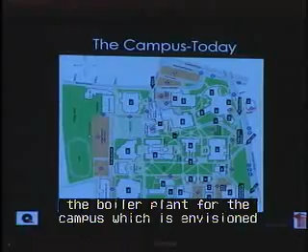For those of you that aren't intimately familiar with where the facility is going to be located within the Queens College campus, there are existing tennis courts sandwiched between the gymnasium and the library, and that whole square is what we'll be taking up with this facility. We're also adjacent to the primary parking garage on campus, and currently what is the utility plant, or boiler plant, for the campus, which is envisioned potentially down the road to be sort of a mirrored quad of the one you have to the south.

Specifically, I'm going to let Louis talk about the design response from Design Collective and how this particular facility fits into that and responds to some of the forces acting on it from each side.

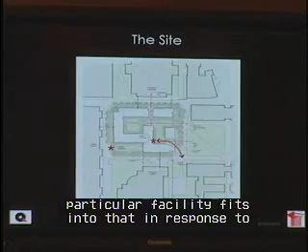Well, as Bruce mentioned, there are several factors that affected this design. The potential for a master plan implementation that would call for that north quad could not be avoided, and the RFP said we had to address that, and of course we did. But also, one had to take into consideration where people are coming from day one - there's a lot of traffic coming from the south quad, from the library, and from the arena. So we took that as an opportunity to say, well, let's have the best of both worlds - let's have this work from day one and have it work in the future.

You can see these sort of delineated axial lines. There's a main axis coming from the arena, so we have an opening in the building you can literally walk through outside. We have an axis coming so that if the quad is built, you could come from that sidewalk directly into the project there as well.

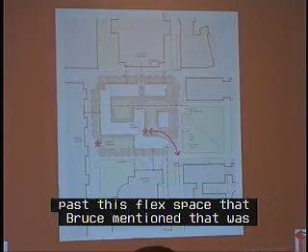The main entrance, shown by the dotted red arrow line, is where most of the traffic comes from now and will likely continue in the future. It takes you underneath another archway, past the flex space Bruce mentioned that's open to the whole university, and directly into the heart of the building.

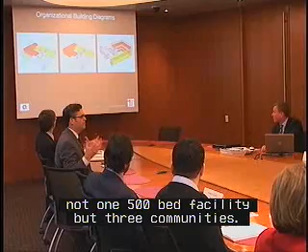From there, these are a series of diagrams we used working with the university to talk about breaking the community into not one 500-bed facility, but 3 communities. If you look at the diagram on the left, we broke the building into 3 buildings arranged around 3 courtyards.

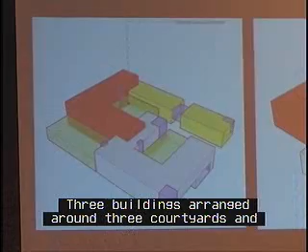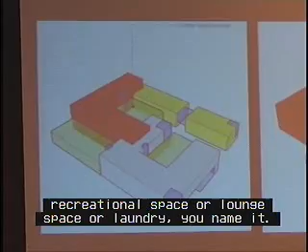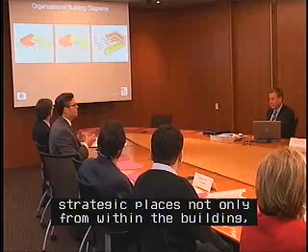Each courtyard had a series of events. In the middle slide, the blue cubes represent all the parts of the program where the community comes together, whether recreational space, lounge space, or laundry. We placed those in strategic locations, not only within the building but also terminating axes within the campus, creating opportunities for exciting architecture.

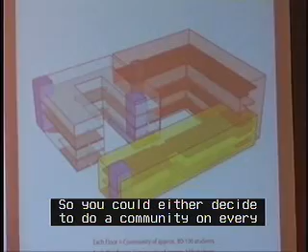The last slide, to the right, talks about flexibility, something the president mentioned. The building can work as either 3 independent buildings, or there's one core that allows it to work horizontally on every floor. You could decide to do a community on every floor at about 80 beds per community, or have every building be its own community.

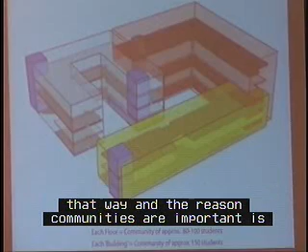Communities are important because they make people feel part of a group. They know the people on their floor, and sometimes you can group, say, certain master's programs, athletics, or music programs together. It's a lot of flexibility, and that's what the diagram on the right-hand side shows.

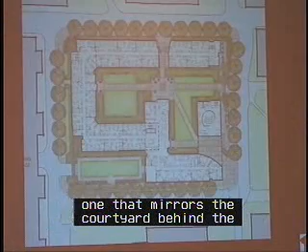Here is the actual plan itself, creating 3 courtyards. Some are more public. The one to the right-hand side is where everyone passes through the project—it's very public. The one to the upper left-hand side is very private, primarily a lawn. The lower portion mirrors the courtyard behind the library.

That courtyard will get some bike storage in addition to being an open space, and it will have an entrance off the backside so you can enter this building from many points. We didn't want to create a wall to the university—we wanted it to feel very porous.

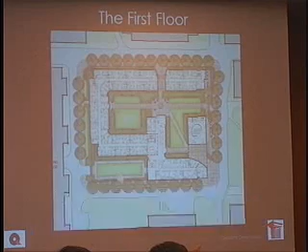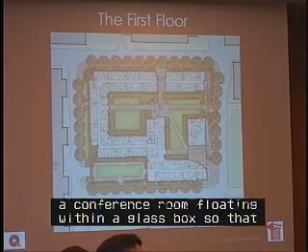However, there is one main secured point. As soon as you come through the main archway, you see the curved path that takes you to one controlled, secured point, and that person can see the elevators—nobody can get any further than that. In the flex space, the square space with the round space within it is a conference room floating within a glass box.

What? Oh, I'm sorry—that's right, the pointer. I know the project a little too well. I have to tell you, I especially bought that pointer at lunch today because he was concerned about not having a laser. I'm sorry, my apologies.

The pass-through here leads to the main entrance, with the security desk and elevators centrally located for the facility. This is the flex space. In the future, this facade could possibly front this quad, and even if it doesn't, it's still the front facade.

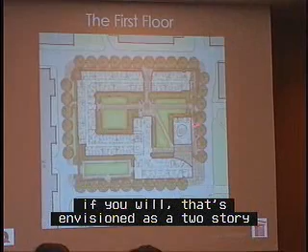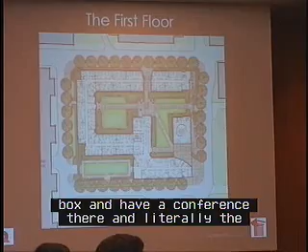It's envisioned as a 2-story glass wall that could be very flexible, so you could have a performance space or a cafe, but if you wanted, you could turn it into a black box for a conference, with doors that close within that inner volume.

This slide is somewhat hard to read, so just so everybody knows, I do have printed copies of this—if you would like handouts, it's a little bit simpler on those.

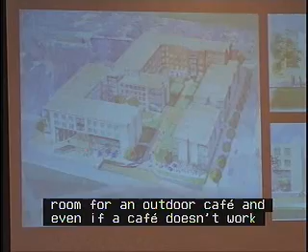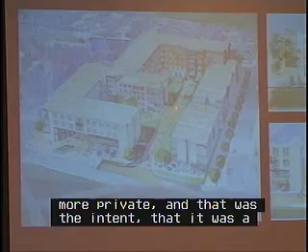This is the flex space, and you can see there's ample room for an outdoor cafe, and even if the cafe doesn't work there, it's space for students to have lunch. It's envisioned as a very public realm, and as you move further into the project it becomes a little more private. That was the intent—a series of spaces, not just one big building.

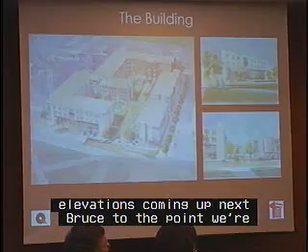Facing east, or the main quad potentially in the future, it has a bit of a civic or institutional feel, but then as you move through the project, it becomes more residential in nature. You'll see in some of the elevations coming up, we're even scaling it down so it has the rhythm and scale of almost a townhouse project.

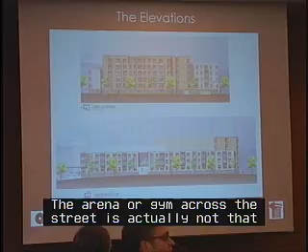The arena, or the gym across the street, is actually not that tall of a structure, and you could easily overwhelm it with 500 beds. You could overwhelm the library or the arena. So that's one of the reasons we really did break this into several buildings. In fact, there's a 5-story building where we made it the tallest, looking back to the city skyline, and that's the tallest portion.

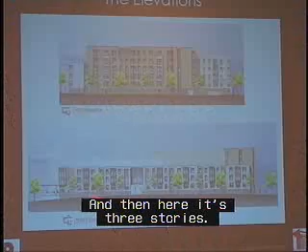And then here, it's 3 stories. There's the archway that's on axis with the campus, and that little bridge you see there is actually the community study space for all the people who live on that floor.

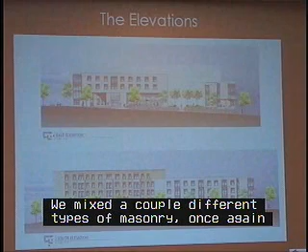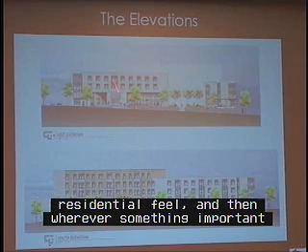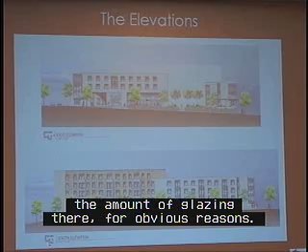We mixed a couple different types of masonry, once again, to give identity to the different buildings. You see a reddish brick here, a more light-colored brick. We introduced bay windows to give, again, a residential feel. And wherever something important happened on the facade, whether it's the flex space, the entrance, or the lounge spaces, we increased the amount of glazing there. You can only spend so much money on glazing for these projects, so we're doing it for maximum impact.

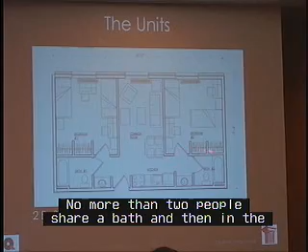The units themselves are fairly straightforward. 85% of the units are either a 2-bedroom shared type unit, each with its own living room and kitchen, and as Bruce mentioned, no more than 2 people share a bath. And then in the 4-bedroom scenario, everybody has their own bedroom, again with a common room and kitchen.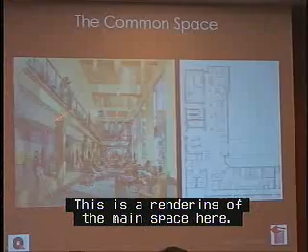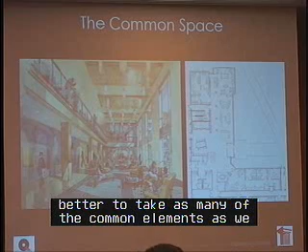This is a rendering of the main space here. One of the interesting developments of this project - many of the slides I showed were part of our original conception working with the university. As the project developed, we decided it would actually be better to take as many of the common elements as we could and group them together on the first and second level at the entrance, so there could be a real synergy and energy between the uses.

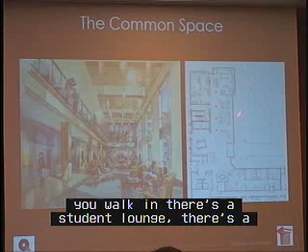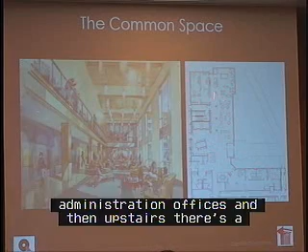So as you walk in, there's a student lounge, a recreational space, a small warming kitchen, music rooms, the mail room, the administration offices, and upstairs there's a fitness center, a laundry room, a series of seating areas on a balcony on the second level, and generous 2-story glazing off to the courtyard.

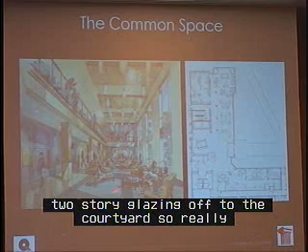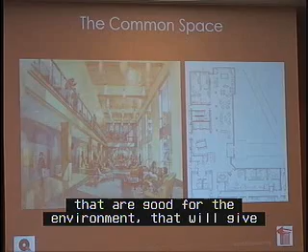So really it's dynamic - this is where we were trying to get at the wow factor, this and the flex space you see, but using materials that are good for the environment, that will give us the green points and LEED points we need. As Bruce mentioned, we are striving to get the silver certification here.

So I think that brings this portion of the presentation to a conclusion if there's no questions. And again, if anybody has any questions relative to the architecture, the design, the finance, or the management, everybody here is able to answer those questions. And if you forget their name...

Nicely done. I would like to say that I spoke to Queens College and they highly support the plan.

With our planners to continue. Have you picked out your apartment yet? I'm looking forward to where we're going to have ours.

Mr. President, just a minor question - I'm curious, because I never asked about City College in this regard, can students pay to have meals on campus, or are refrigerators provided and you go shopping, like living independently? You can live independently, but of course we have food service within a short walking distance, and one can have a food plan there.

But we're anticipating most of these students will want to use their kitchenettes. Mr. Chairman, when I was at City College, Fresh Direct now delivers up to City College, and I've noticed a number of Fresh Direct boxes. Yes, so I think the students aren't going hungry at these dorms.

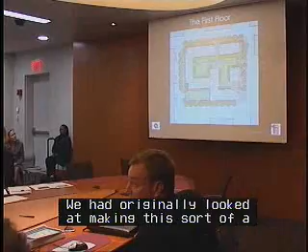Sorry, that's a trick. We had originally looked at making this sort of a graduate hub, if you will, where we would put specifically dedicated graduate-style units. Graduate students tend to be the most price sensitive and they want the most space and most privacy, which unfortunately makes the pro forma more difficult.

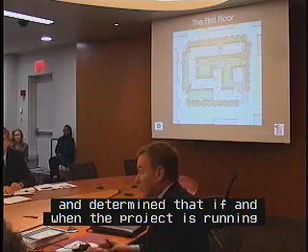Rather than locking ourselves into that model, what we did is we reevaluated the two-bedroom shared units we had and determined that if and when the project is running as anticipated, if there was demand for graduate students, those units could be converted to one-bedroom or two-bedroom single units appropriate to graduate students, and they would be relatively isolated in their own section. You could do that on a floor-by-floor basis, so you're not necessarily taking up that entire wing, but you're still giving them some autonomy and separation, with a unit appropriate to them.

Thank you. Wanted to ask about security. I know you said there's a guard at the front. Is there a guard in each building? And how do the students have access? Do they have to show ID, or can other people just come in?

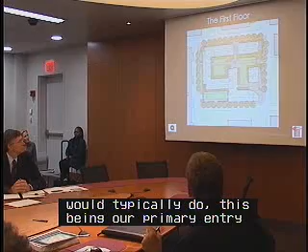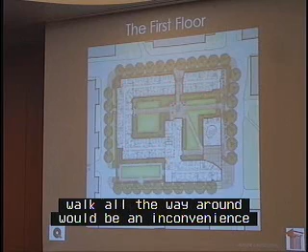What we've got, and Louis talked about the idea of having this building accessible from many locations, which is true to the site but not true to the interior. The interior is highly controlled. This building is a little bit different than what we would typically do, with this being our primary entry point, from the campus here and from the garage or the other parking structure back through this way. Both of these points of entry go by the security desk. The other point of entry into the building is over here on the first floor, because to come in here and walk all the way around would be an inconvenience students probably wouldn't put up with for long.

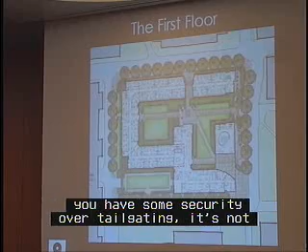Access to the building is through a proximity card, so you have to have a proximity card and swipe it. These doors have cameras and intercoms, and are viewable by the security desk right here. So nobody can theoretically get into the building without being seen. They swipe their card, it alerts the security guard, the camera turns on, and he can look and see who it is. So you have some security over tailgating. It's not foolproof, but you have a reasonable degree of security, and anybody that comes through has to go by the security guard and swipe their card.

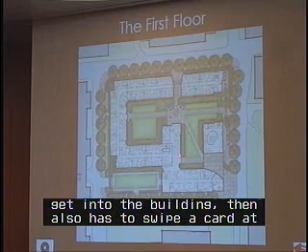On this particular facility, we have what we call a two-swipe process to get to the residential facility through the main entry point. Anybody who comes in has to swipe their card to get into the building, then also has to swipe a card at a door to get to the elevator or the stairs. So if there's an event in the common space without student occupants, those folks can enjoy that space but can't necessarily get to the student rooms easily. Again, there's tailgating, where a student who's allowed opens the door and somebody not allowed follows them in. That's a diligence factor that Patrick has to train the student occupants on.

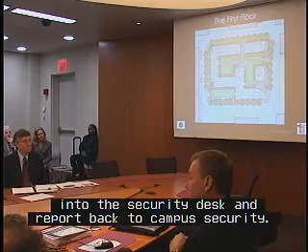But there is a pretty good sense of control here. The security desk has visual access to the elevators and to the stair entry door. The security guard is 24 hours. The units and the bedrooms are all on standard keys, so they're not part of the card access system. The interior cameras all tie into the security desk and report back to campus security. The exterior cameras report directly back to campus security, as do the cameras in the parking structure below.

First of all, I agree. This is wonderful. My students, John Jay students who are at the City College dorm, really love it. And as a graduate of Queens, as so many of us here are, I wish this had existed when I went. I lived in a furnished room in a rooming house near campus so I could have a place to live while going. So this is really wonderful.

But when you said there was a survey done of interest and 1,000 students indicated interest, was that with the knowledge that the monthly rent would be about $1,400 for the larger unit? The Brailsford & Dunlavey market study, the demand analysis, was actually based on a unit type associated with the cost, so it's driven by price. Actually the highest-end unit, the market study suggested more demand than we're providing for. The highest cost unit in our facility is less than, I think, 5%, whereas they were showing demand for slightly more than that, 10 or 15%. The meat of our facility is the low to mid cost product. They suggested an initial phase of roughly 80% 2-bedroom shared and 4-bedroom units, and we bumped that up to 85%, eliminating some of the higher cost units. They also had a demand for a number of suites, but that was determined to be inappropriate because of the lack of dining services that the campus currently has.